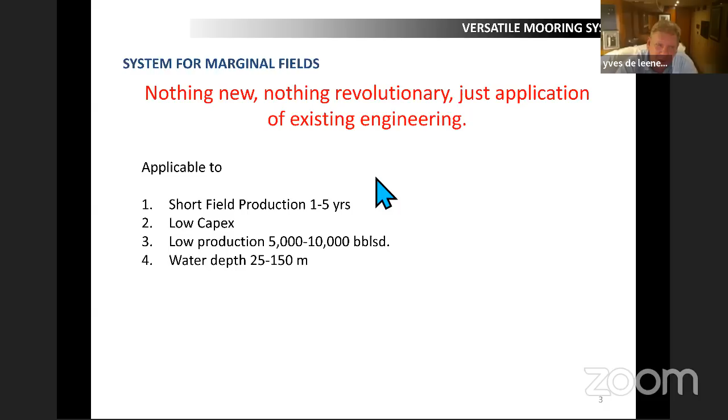So, marginal fields. The way we've done it is that obviously you don't have an FPSO, so you still need to process the oil and gas. So most of my clients have used a jackup with production on it.

And once they had that, they could send the stabilized crude and sometimes a bit of water, sometimes a lot of water, and we can talk about that later. And the key is that instead of buying a vessel, the client goes on the market, or we help them to go find a standard trading tanker that is willing to stay a year, 2 years, maybe 3 years, or less than that, in a specified location.

So it's a trading tanker. That's extremely important because trading tankers are under class and they remain trading tankers. So we call them temporary storage tankers, which means they are just trading tankers and remain under their class society and the class certificates. Everything is still applicable, which means we don't have an FSO notation or FPSO notation. It's all a standard trading tanker, and that's very important for the cost and for the speed at which you can develop this system.

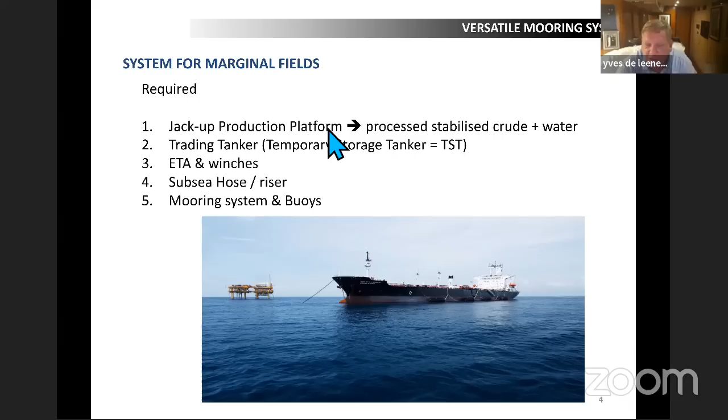So like mooring, I've talked about it already, but you're going to connect full chain to your ETAs at the bow. Normally there's no ETA at the stern, there is a towing arrangement, but you can't use that because, as I mentioned, you are still a trading tanker. So you can't use your towing arrangement and your tow wire at the stern for other things. So that has to remain there.

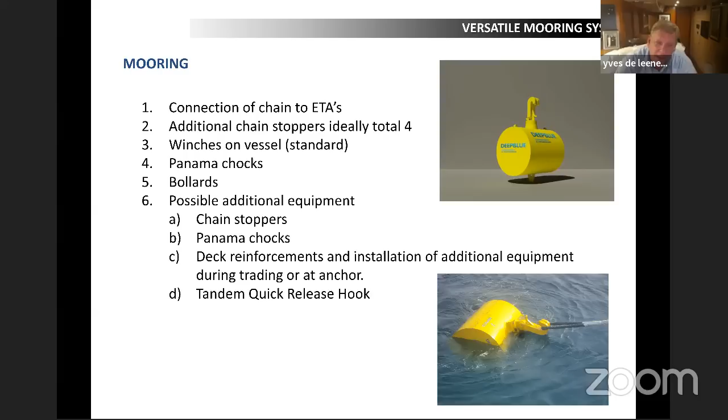If you want to stay more than a year, especially in Southeast Asia, we're dealing with monsoon weather, where in a yearly monsoon wind speeds up to 70 knots are quite normal here. In which case we would like to add chain stoppers because we'd like to have the ETA at the bow. We'll use that, but then we'd like to have two lines at the bow and 2 full lines at the stern. We also use the winches for additional lines. And then, of course, we'll need Panama chocks, either existing or, if we go with additional chain stoppers, new Panama chocks for high rating. We'll use the bollards on board the vessel. I'll show you that later.

So the possible additional equipment, if you want to stay longer, is chain stoppers, Panama chocks, and then, of course, deck reinforcements required, and I'll go to that a little bit later. And if you want to do tandem offloading, you can add a quick release hook at the stern. These are standard. You buy them from Mampaey and Pusnes and other companies.

So basically, we're looking at chain, which can be found easily normally, because you're not following class society. Technically your chain system doesn't have to be class approved. So your chain mooring system becomes a terminal. It's not a permanent mooring system. Therefore, you don't have to follow class, which means you can have different sections of chain, you can connect them to each other, and you can make up chain in different sections, which is not allowed for permanent moorings, as you know. So this is an advantage. You can find chain around the world. If you're in a hurry, you'll find some.

Panama chocks and chain stoppers. We're talking about OCIMF chain stopper standards. You find them around the world. Within a month, you can have them delivered wherever you want. The tandem quick release hook might take a bit longer, but that's okay, because you can do side-by-side offloading, and I'll go into that later. And then your deck reinforcements. I've used a company here, but there are companies all around the world that specialize in doing work on the tanker while it's either at anchor or still trading.

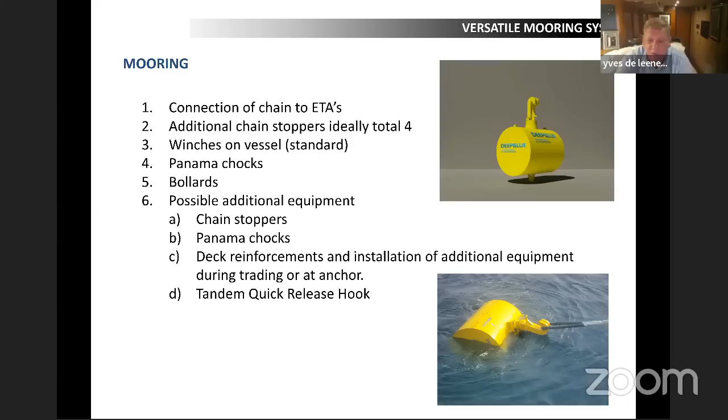You might put a habitat around your welding system, pressurized habitat, and you need to follow some good HSE rules, and you'll have to go through the company HSE requirements and all that, but that's all doable. We've done it, so no issue there. So I'm sorry if it's a bit small.

Now, the idea is not to disconnect, but if you design the system not to disconnect, then you start looking at 50-year, 100-year storms, which means you need to have bigger chains, longer chains, you'll need bigger chain stoppers. So you're looking more or less at a permanent FSO.

So the idea here is to say, well, looking at the environmental data, we guarantee that the system will work up to 90% of the time, let's say, over the year. And for the 10% of the time, you need to have a procedure to disconnect. And that's why we use OCIMF chain stoppers and winches, so that with the equipment you have on board, you can safely disconnect, even if it's blowing 40 or 50 knots. You might need the help of some tugs, but tugs you always have in the field.

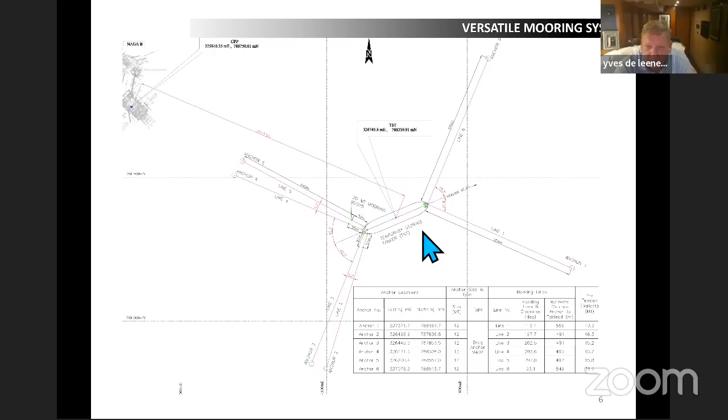So just to remind you, these chains here at the stern are, again, 76 mm, so 500 metric tons breaking load, we have a buoy, and then we connected steel wire, and we doubled up our lines so that we could multiply the 60 metric ton at least by two, so we could see 100 tons on each system. So we had 2 times 200 tons limit on the bow and 4 times 100 ton limit at the stern. So that gave us 200 tons on each corner of the vessel, basically.

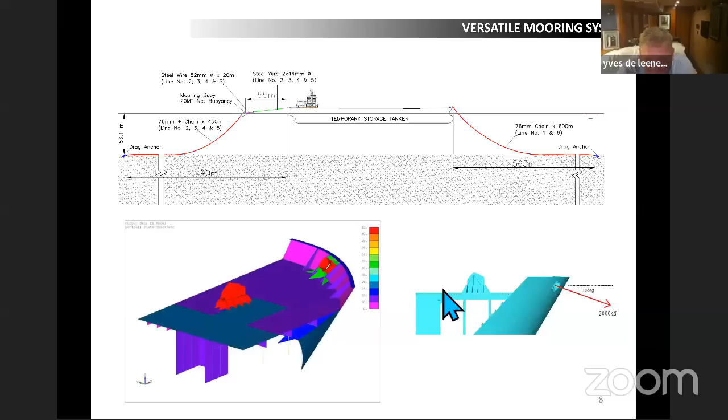Oh, my apologies. There you go.

Now the drawing above that you saw had four buoys at the stern. That was fine for a short period, but we had a project where we stayed more than about 2 years, and the client wanted it hassle-free. They wanted to disconnect as little as possible. So what we did is we added 2 OCIMF standard chain stoppers, 2 Panama chocks, and obviously we had to increase the deck stiffness with extra beams below the deck.

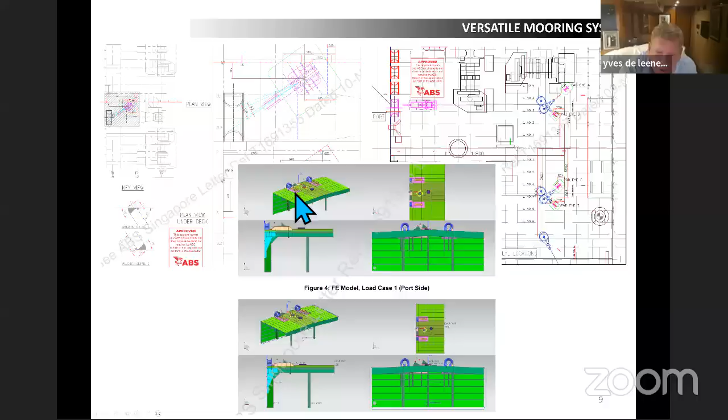So we did it at anchor. None of the cargo holds had been gas freed, so that's below the aft peak. So no problem. We did that within 10 days. We prepared the steel in the workshop. We got the drawings approved by ABS, and then once the vessel was at anchor, because we had to go fast, we worked 24/7 with teams and reinforced the stern. As you can see, we had to reinforce this part of the vessel as well. And in 10 days everything was done, painted, and ABS approved.

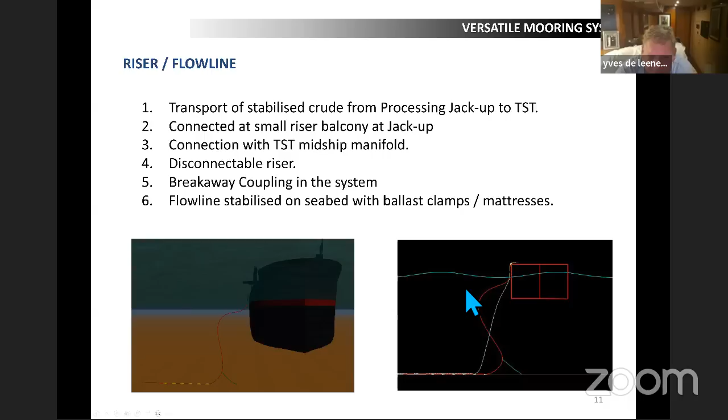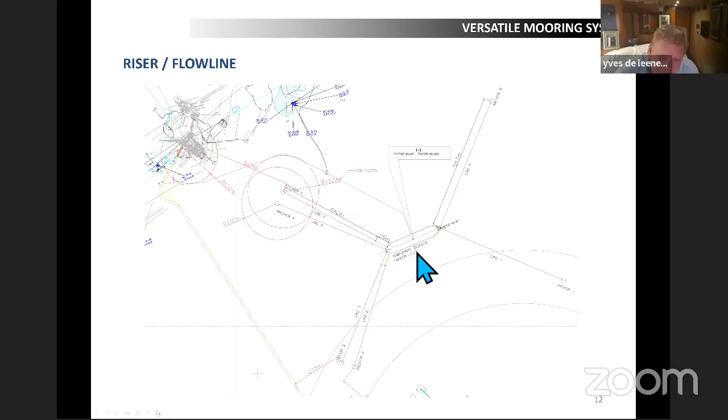So like I said, we needed a tether system to control the riser. We called it a holdback clamp, and then tether and a big gravity base. These systems are easy to design. So we designed it, we built it, and we installed it. That's the actual riser we did use on one of the projects.

Like I said, some of our clients wanted us to put a tandem quick release hook and a system. Other clients said no, we don't have the finance for that. We just want to make sure we can do a side-by-side offloading, which is then your standard offloading. And remember, this tanker was about 240 meters, so probably 600,000 barrels. Now, with a production of maybe 10 max per day, that's 2 months, all right? And 10 is at the peak.

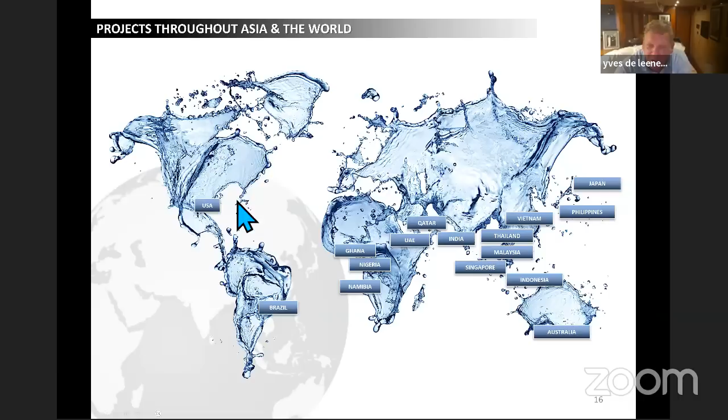DEEPBLUE follows ABS, ISO, and yep, that's it for me.

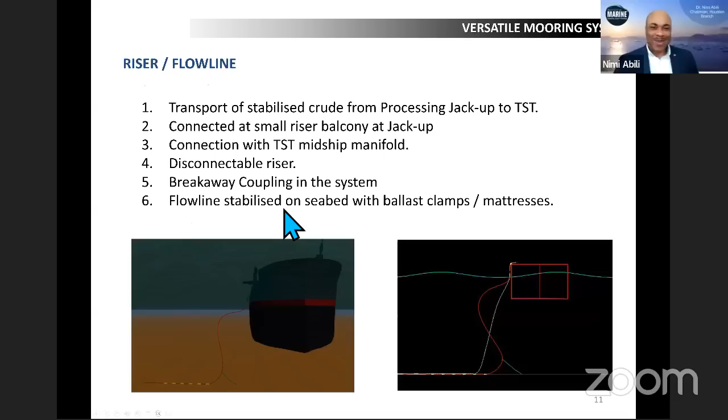So if you have any questions, Dr. Nimi, I'll give it over to you, and you can read them out if there are any. Yeah, thanks so much, Yves, for this interesting presentation. Quite insightful. There's so many lessons learned here, especially when it comes to marginal fields and how we can actually exploit most of these methods so that we can actually commercialize these fields more.

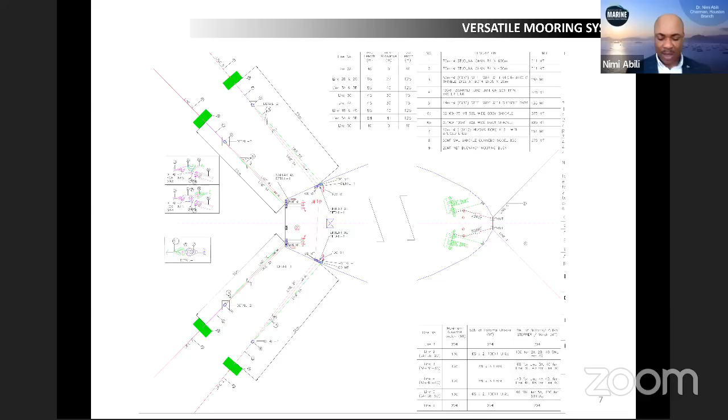The other question, Dr. Nimi? Yes, the other question basically is: is the STS normally included in the safety case or positioned outside the exclusion zone? If in the safety case, is there a hierarchy or SIMOPS?

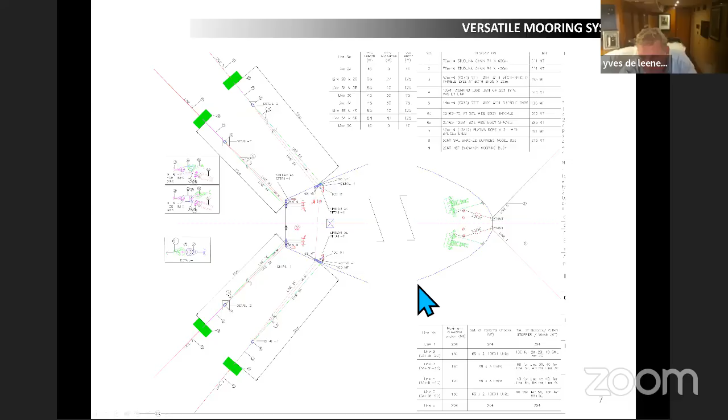So we didn't disconnect and go outside. I remember we looked at that, but we were on the starboard side, and we were a kilometer away from the production. We stopped the production. I don't remember if we flushed the line or not. And people were a bit stressed because, as you see, there wasn't much. It was about 17 meters difference between the two. I don't remember if the vessel was exactly that size, but I remember they asked us, well, what happens if we use a similar type vessel?

The reason why we've looked at that instead of disconnecting and going away is because reconnecting would take probably about 2-3 days. Disconnecting the crew could do by themselves, they'd been trained, but reconnecting we needed to bring in a new installation crew. And so from a timing point of view, from a financial point of view, we've looked at that, and we would have lost.

The problem we had is that it's not the loss of a bit of production. In this project, it was a huge gas production platform, and we were receiving the condensate, and they only had about 3 days of empty pipelines where they could send the condensate before they had to stop production. And if they stopped production, they would get penalties from the gas contract they had with the government.